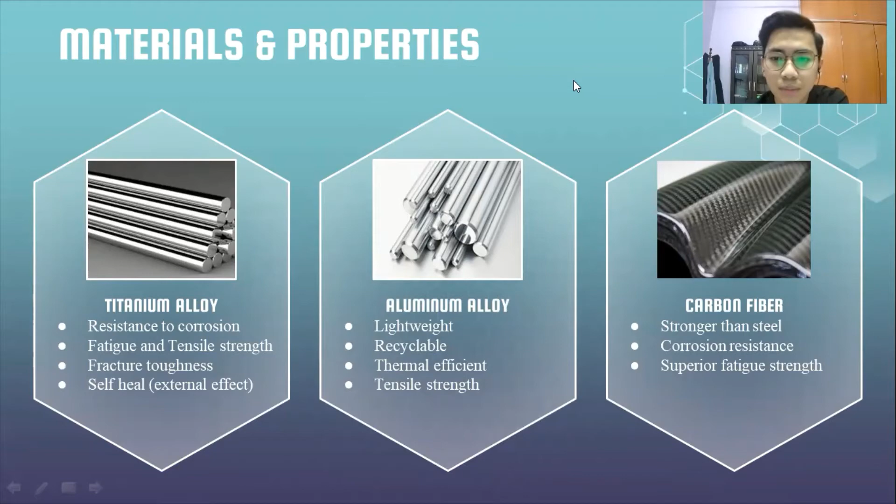The glider design is made of high strength and lightweight materials. Structural materials are mainly made of carbon fibers, aluminum alloy, and other advanced materials. The wing surface is molded with high precision, highly polished, and coated with gel coating. The purpose of the design is to reduce resistance and improve efficiency due to the different force on the upper and lower surface of the wing.

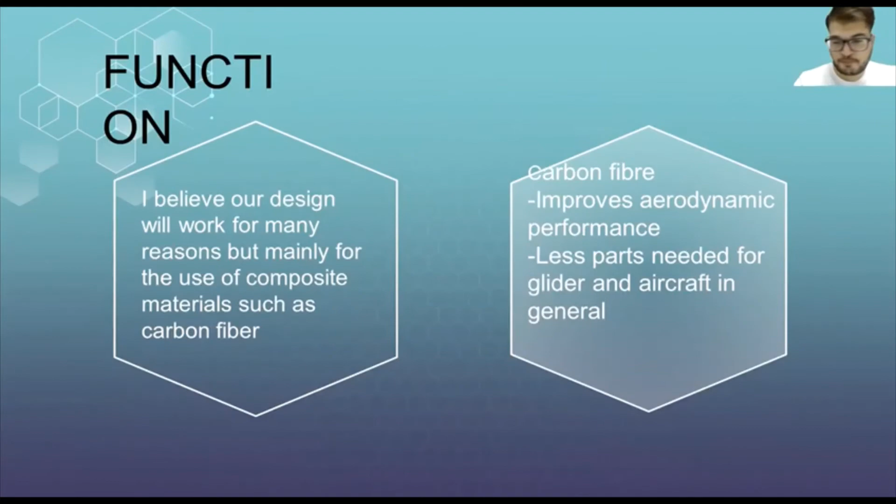Based on the advantages of the materials that we mentioned before, we have three main benefits for our modified glider, which are environment, cost, and safety. When these three main benefits are provided to our models, it will become a choice for sports and also for pilot training.

Let's talk about pilot training. Because this flying glider is almost the same as an aircraft, it is a very suitable model for pilots to get flight simulation.

When these two activities bring out the next level of benefits, this phenomenon we call the domino effect. When there's a need, there will be a race or competition in technology, so when gliders become a sport, there will be a race or competition in the technology, and the technology is upgraded and advanced.

By this, we can improve our country's economy, and when the economy of the country is improved, job opportunities will be created. So we can see the benefits of this modification is actually a domino effect which brings about some activities, then development in technology, and the economy of the country. So that's all from my part.

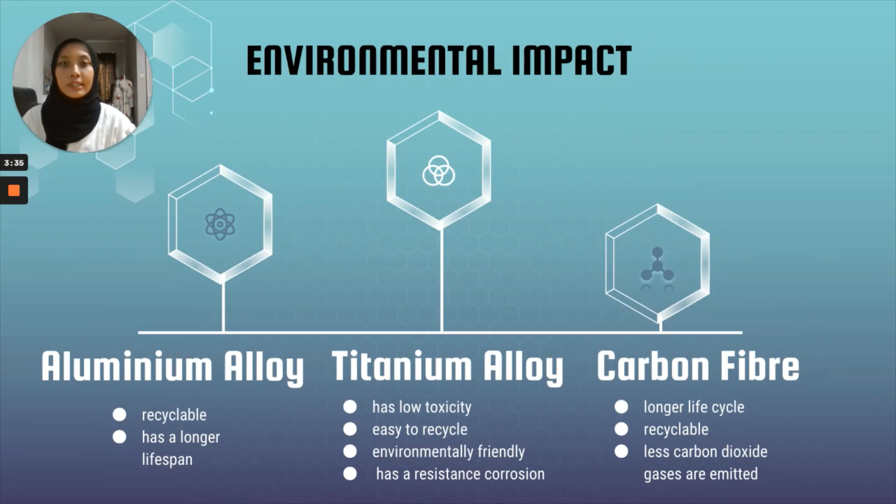And lastly, carbon fiber. It has a longer life cycle compared to other materials. It's also recyclable; for the recycling method, it uses a process called pyrolysis, where carbon fiber is heated in an oxygen-free atmosphere. Lastly, less carbon dioxide gas is emitted as carbon fiber is light, so it will influence the fuel consumption for the glider.